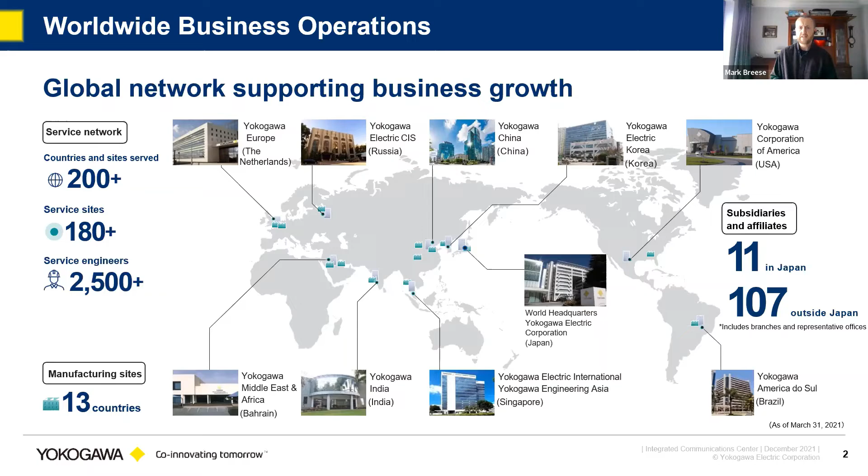But before I get into that, I think it's worthwhile saying a little bit about Yokogawa overall as a business. Yokogawa itself is a large business headquartered in Japan, and today it has offices all over the world, including 2,500 and growing service engineers to support people's needs. So no matter where you are, there's always someone from Yokogawa close by, ready to support and help with those needs. And the RAP business is a part of Yokogawa.

We began in the early 1990s with our digital software solutions, originally for very high hazard petrochemical and chemical industries. Since then, we've expanded from our original UK HSE type base to Europe, Middle East, US, Far East Asia. Over that period of time, we've consistently added new modularity, new capabilities, new solutions to our overall control of work offering in order to give our customers better visibility and even easier access to all things safety. But let's look at that safety in a little bit more detail.

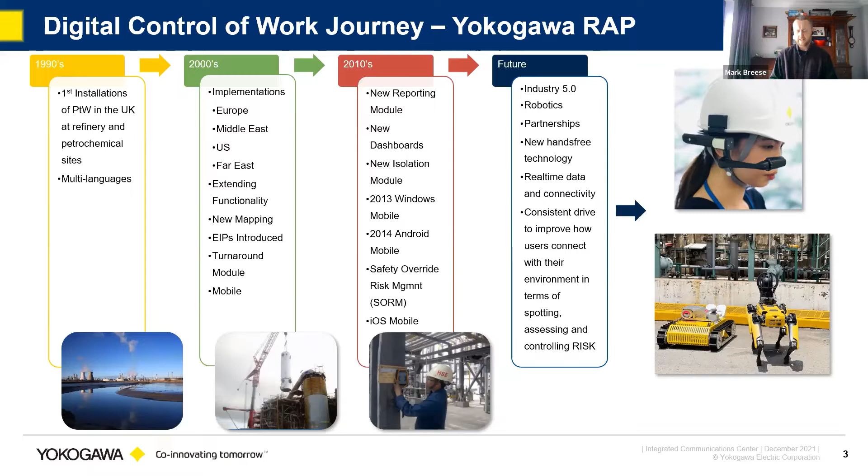What is control of work? Well, control of work isn't just the creation of a permit. It isn't just getting some signatures on a piece of paper or an electronic form to go and do work. Control of work is really about 3 things at its core. It's about the capability of being able to carry out risk assessments so that we can understand the work required and all of the risks associated with it. It's isolation management so that we can manage all forms of power that might affect people carrying out work.

That could be electrical work, it could be fluid power, it could be motive power, it could even be vehicles moving around the place. And those then tie together with the permit, of course, which has to have all of the authorizations and digital signatures together with it to produce an overall control of work solution. And of course, digital solutions are the easiest way to achieve this.

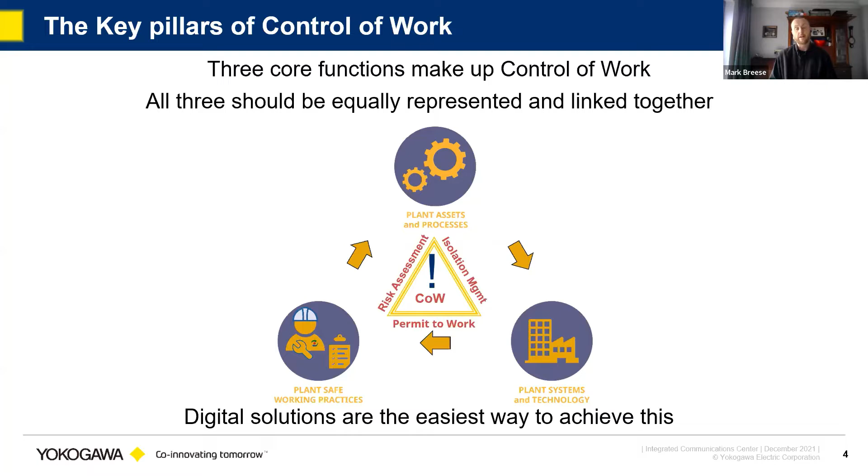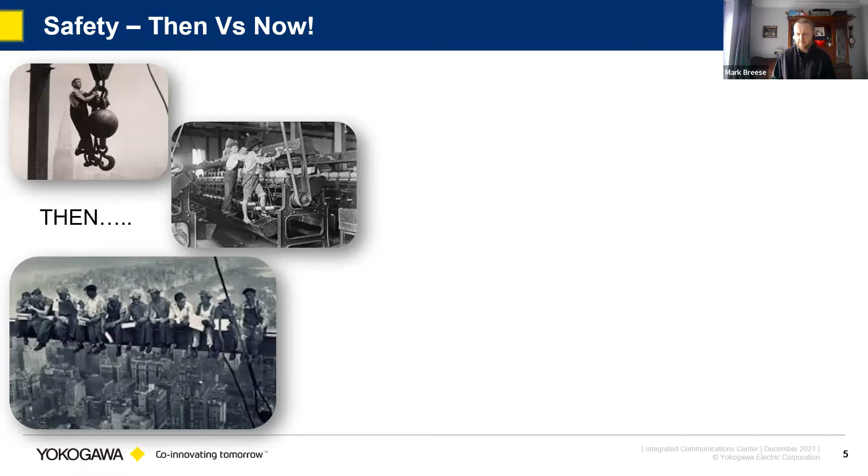A sad fact for you on that one is that for every foot of altitude in those skyscrapers, one person died in terms of the overall fatalities involved. And of course, today, life is much safer. We don't do things like that anymore, or do we? These are some typical examples of unsafe working that all of us will have seen on a reasonably regular basis. My favorite is the one in the middle where you've got three guys standing on a plank so that one can step out into an area to carry out some work. Incredibly dangerous.

It only needs for one of them to turn around and slip, and two are going to get a fall over, and the other one is going to plummet between a ship and a dock. Okay, some of these examples are from all around the world.

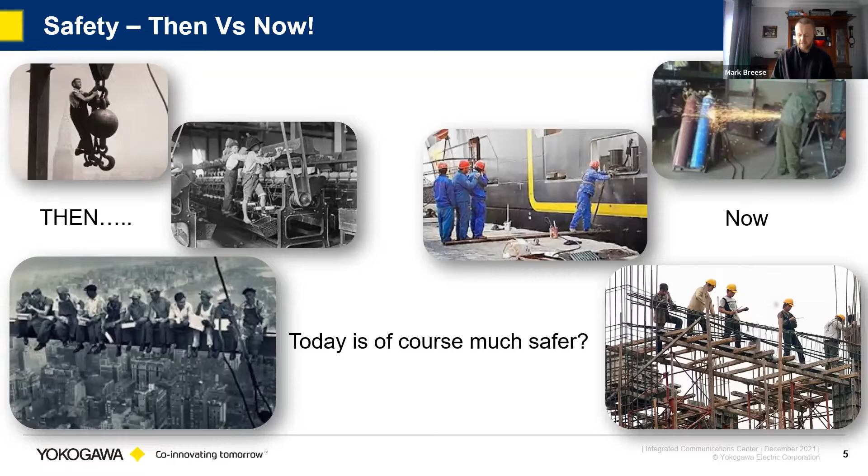So let's look at Europe and see how safe Europe really is. Some statistics for you: the latest statistics produced in Europe were 2019, just before the pandemic. In Europe as a whole, not including the UK, there were 3.1 million non-fatal accidents - accidents where people got hurt and had 4 days or greater away from work to recover, but weren't fatal, which is good.

However, in 2019, 3,408 people failed to come home at the end of the day because of a work fatality, which is a really scary number. The ratio is broadly about 920 to 1 - if you think of it as 1,000 to 1, for every 1,000 incidents you get one fatality.

That's about right. And sadly, non-fatal accidents and fatal incidents are increasing, with fatalities increasing faster than non-fatal accidents, which is interesting in and of itself. The core reason this happens is because 60% of accidents occur due to lack of or inadequate control of work, with poor understanding of risks being the primary factor.

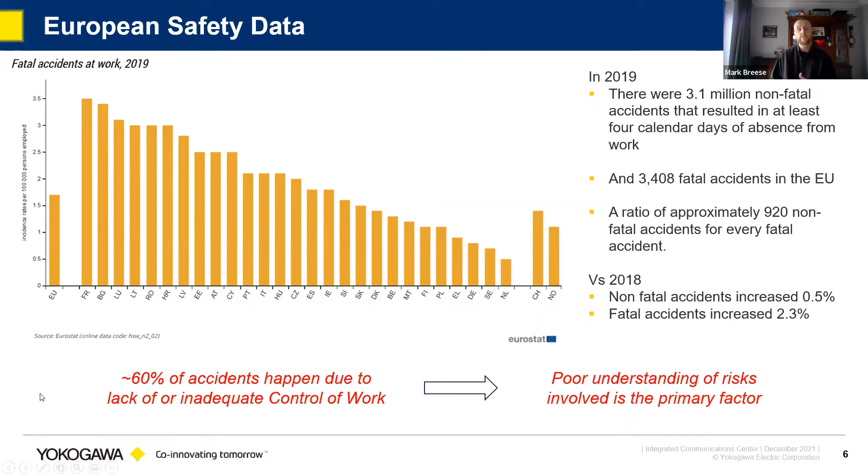Now, when we look at that in more detail, obviously people are trying to do things about it, and national and international standards are driving towards greater and greater levels of responsibility towards safety. The most recent of all is the new ISO 45001, replacing the Occupational Health and Safety Standard 18001.

There's an interesting paragraph in there, section 5.2, which says that safety can no longer be delegated. What that means is that safety cannot be the responsibility of the health and safety manager, or of individual people working within a business. Of course, everyone's responsible for safety, but the ultimate accountability remains with the management of any business now, in the legal format of the ISO standards.

And even the old 9001 standard talked about risk management and safety, saying that those who lead the organization must promote risk-based thinking. Well, if you're an ISO 45001 company, you have to do more now than simply promote risk-based thinking - you're ultimately responsible for it.

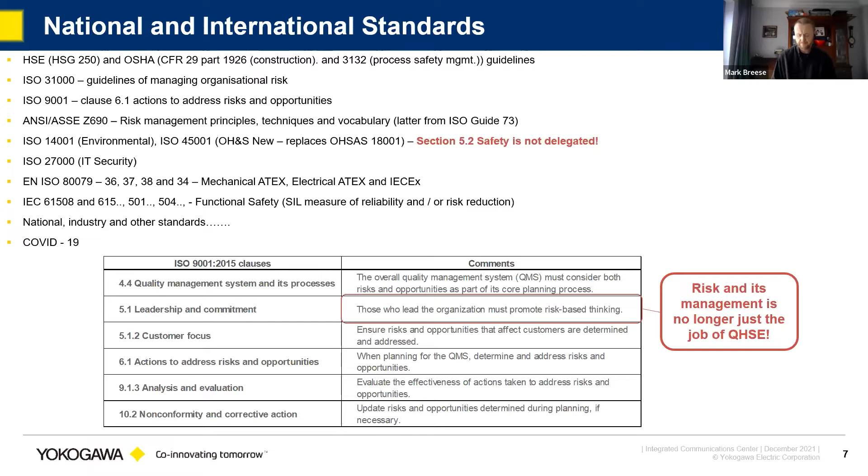In essence, we've seen the figures I've just put up, we've seen the details, and we've seen that we're trying to get more responsible and have tighter regulations around health and safety. So I think you'd all agree we have to be able to do things more intelligently. If we can do that, it will help us work more safely and really learn the lessons from the past and the incidents we may have had, to make sure they don't happen again in future.

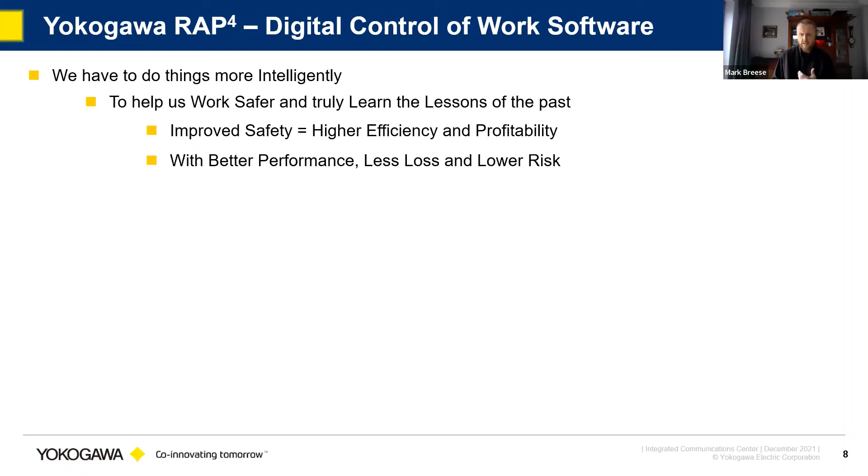Because if we can do that, improved safety will lead to higher efficiency and profitability and better performance for the business as a whole, with less loss and, of course, lower risk. And that's really where the RAP4 system from Yokogawa comes in.

It provides a series of modules, from risk assessment to safe lockouts, through mobile functionality and all of the other services you'd expect around that. And at its heart, a capability to have a common safety vocabulary that's really easy to use and understand by everyone involved, to make their work and their life a little bit safer.

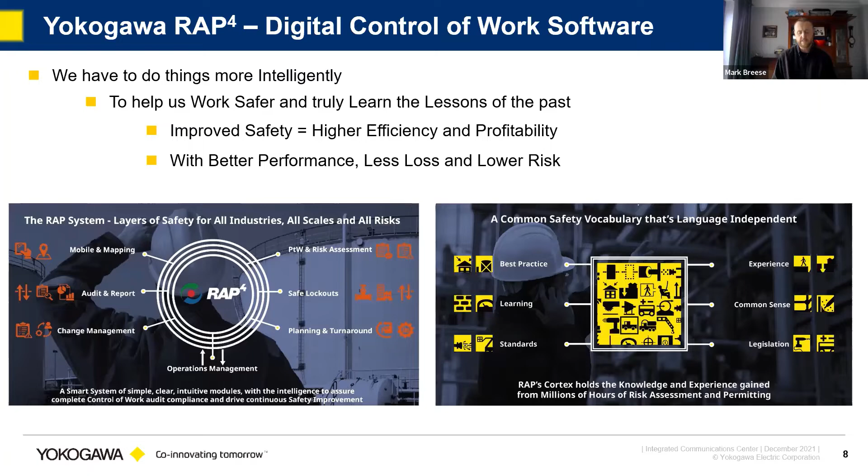And that's set out as a linked, intuitive workflow that's easy for everyone to see every stage along the process and to be able to carry out audits along every stage of the process. So in essence, you get a smart system of clear, intuitive modules with that intelligence baked in from day one, to assure complete control of work compliance and to enable businesses to drive continuous safety improvement.

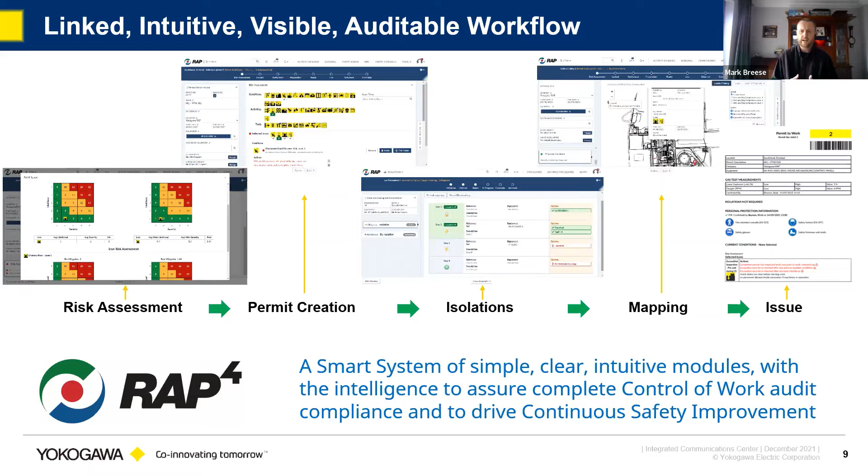And let's look at how it does it. So instead of giving you a massive wad of paper to fill in with tick boxes for applicable and not applicable and decisions to be made - and those can be in simple digital format or paper format, depending on the traditional modes of working.

The RAP4 system does exactly the same thing, but it allows a greater level of focus by simply asking: what are the conditions under which we're working? What are the activities that we're carrying out? And what are the tools being used to do the work?

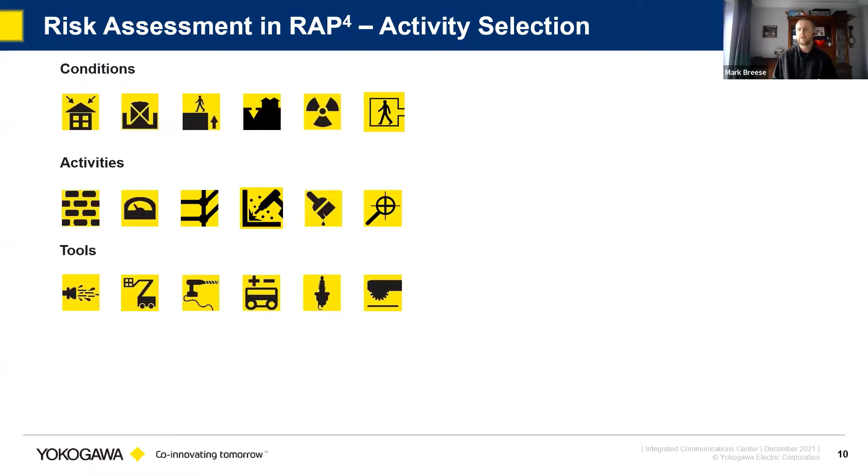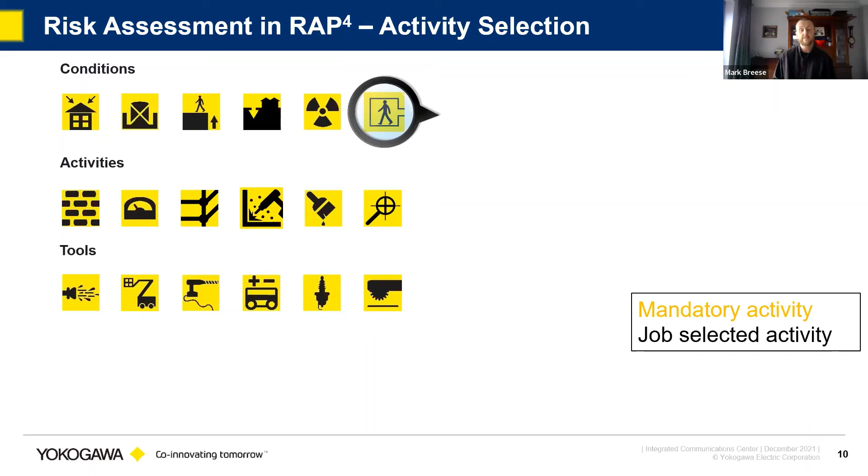So if I take an example of a confined space, behind that icon we would hold all of the mandatory activities required to do the work and all of the job selected activities, specific to that individual work item. So in a confined space, we might be placing a standby man

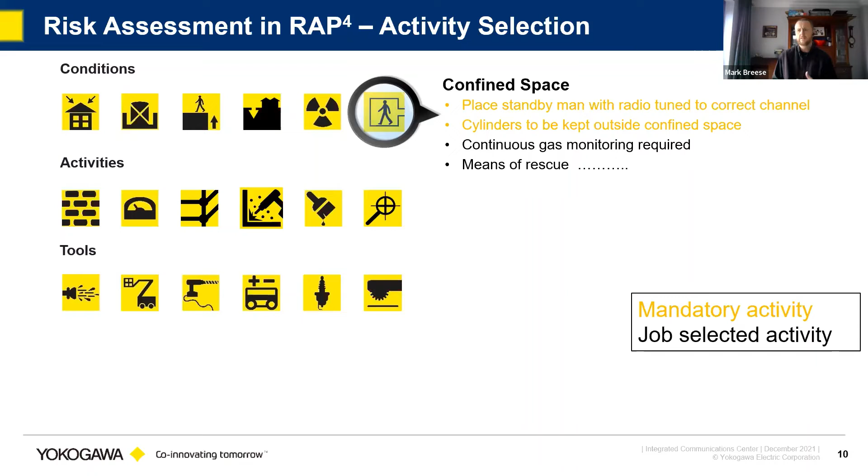independent of the work in case something goes wrong, so they can call emergency services. As optional activities, we may have continuous gas monitoring depending on the type of confined space we're entering, and these will differ depending on the icon selected. So if I pick welding, another set of rules would be applied automatically, and if I'm carrying out water jetting, another set of rules, including making sure I don't electrocute everybody along the way.

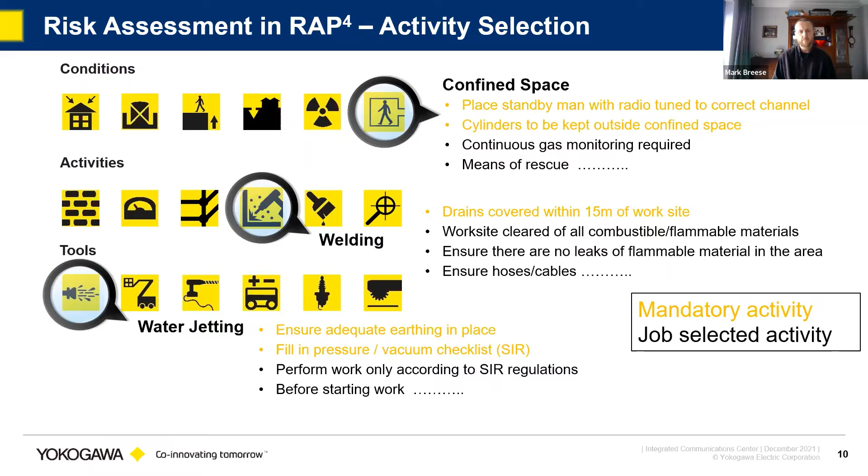So we not only have mandatory activities and job selected activities, but each icon can also be configured to hold additional items such as the PPE required, the authorized signatures at each step to make sure the risk assessment is correct. Exclusion zones can be set, and lots of other data can be tied to the selection of the icons, and that data is very specific to those icons, so it's relevant. You get away from all of the non-applicable decisions that have to be made under normal conditions.

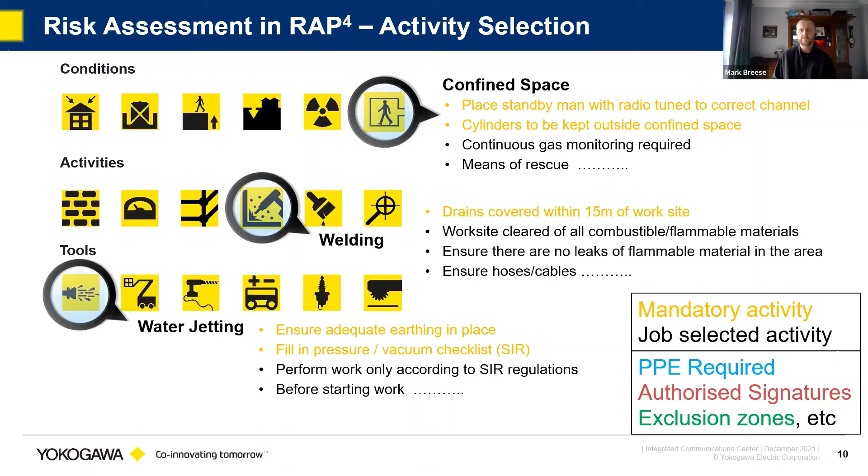So when you come to carry out work using the RAP system, it looks a bit like this. We have a master certificate vault that holds all of the information set up for our facility, and we simply look at the work we're doing. In this particular case, we've got a dirty confined space that we are going to clean.

Once we've done that, it will of course be a clean confined space that we may choose to inspect. And once we've inspected it, we might carry out some repair. So the way that we organize work is as simple as 1, 2, 3. And being able to use a digital system allows us the level of granularity we need.

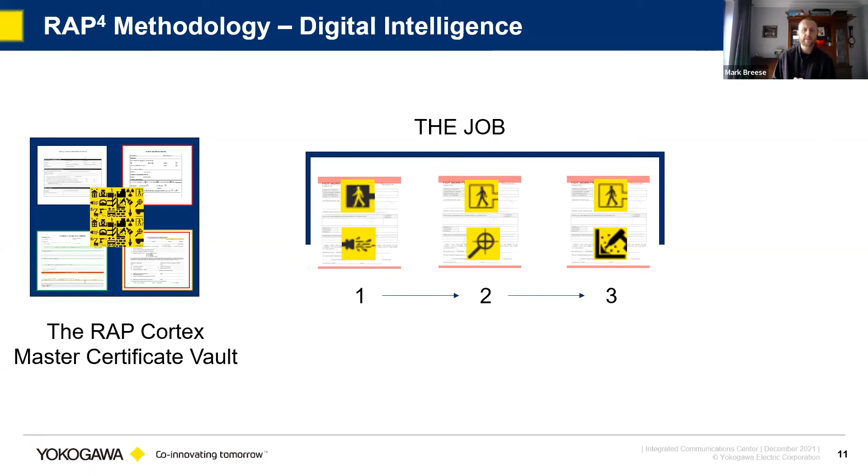As an example, if I look at confined spaces, there are lots and lots of forms. They may be clean confined spaces, there may be dirty confined spaces, which have far higher restrictions applied to them. It could be inert, floor and ceiling voids, which are things you see quite often particularly in the pharmaceutical industry - very important to risk assess for, often with low head height as well.

Habitats and enclosures, when we might build a tent around the work that we're doing. And even excavations, when they go below about 0.5 meter, become confined spaces in the eyes of the law. So we need to be able to risk assess.

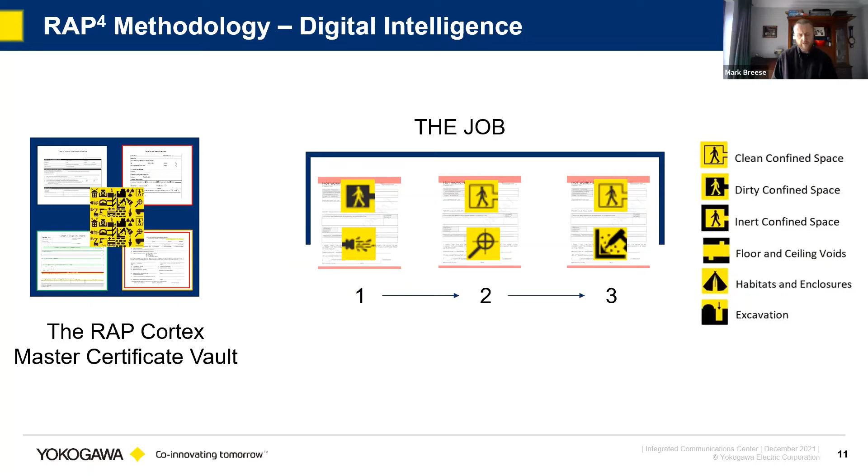We also need to be able to tie together all of the forms of isolation that may be required in order to make them safe. The examples you can see in the pictures would be process isolations - simply closing valves and locking them out to make sure there's no fluid running. But the isolations may indeed be electrical type isolations or others, as I've mentioned before.

So isolations allow you to specify all of the equipment associated with the isolation so we can control those energy sources, and have the ability to attach drawings, schematics as may be necessary, to print lockout/tagout tags to be in full LOTO compliance. And the system also allows mobile devices to be used to confirm that isolation status in the field.

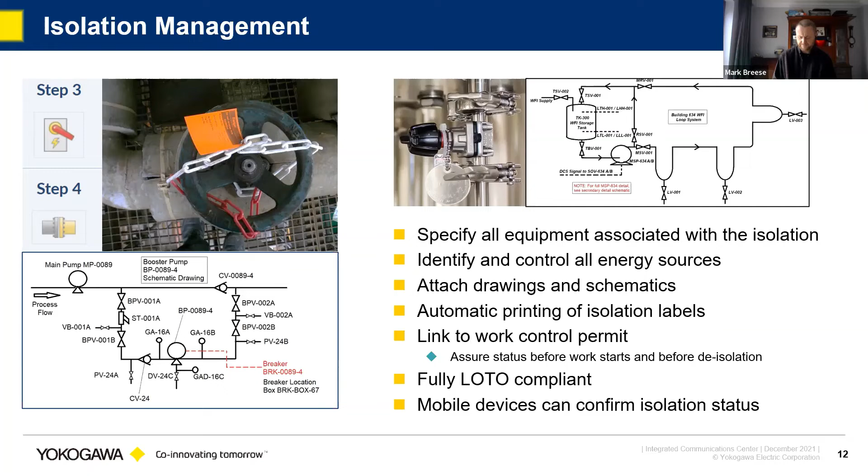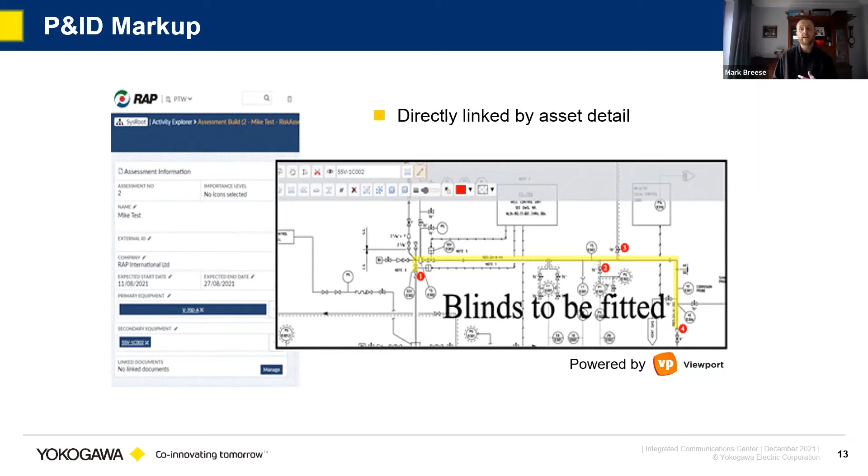Indeed, we can also look at drawings and mark up P&ID drawings to give the team doing the work detailed instructions of what's required for them to carry out as work. And that information can be fed in from the beginning from CMMS systems - examples might be SAP or Maximo - so that the whole thing is a seamless transfer of information from the original creation of the work item right through to carrying out and doing the work successfully in the field.

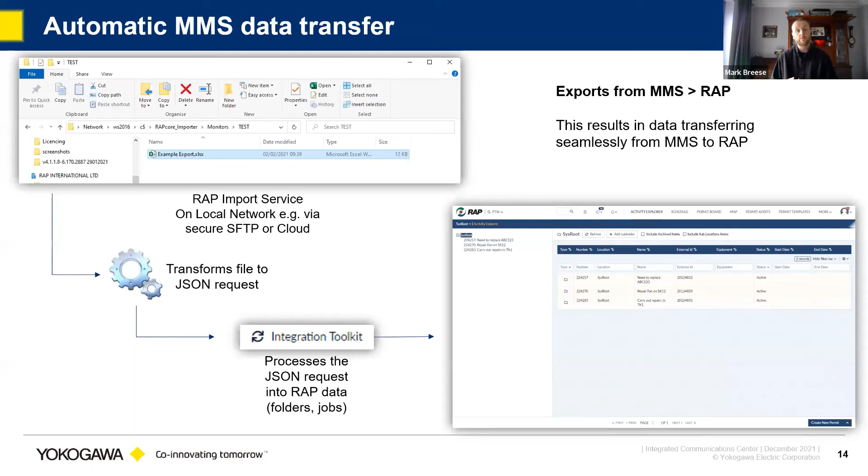So we can look at existing risk levels, we can look at future risk levels, we can look at the types of jobs that we're being asked to do, and we can start to level load plants, which not only makes them safer places in which to work, but also makes them more efficient.

So really what we're looking at here is an integrated workflow. We start with the core risk assessment. It's why the RAP system has the name RAP. RAP simply stands for the risk assessment process, because it is at the heart of everything that we do.

So we start with risk assessment. We then create the permit. We select the icons as part of that work. We tie together the isolations as may be necessary and are able to fully map the process so that we have the greatest level of visibility possible for all of the workforce when they come to do the permitted work. And yes, all of that is visible on mobile systems and can be mobile mapped.

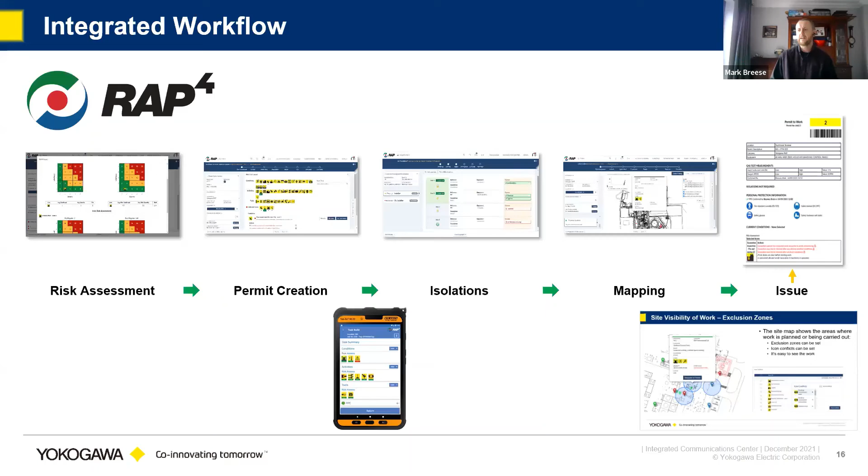So when we look at it in a bit more detail, we might look at where the work is, and that would allow us to see where there are exclusion zones as an example. In this particular example, what you can see is two circles. They're actually cylinders because they go through the floors above and below to make sure that work above or below is notified. But you can see the exclusions where the item with the red dot can't begin while the item with the green dot is still going ahead.

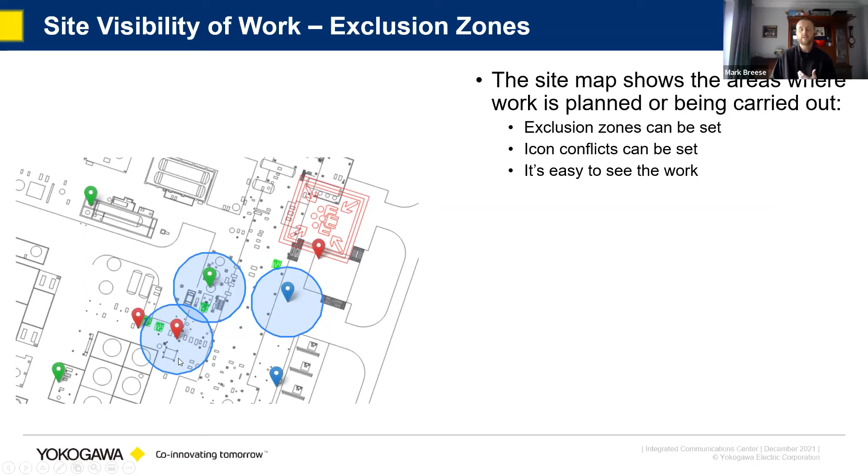We can use the system to simply look at what we're doing, in this case, some inspection work, and we can see what sorts of exclusions we can apply and conflicts we can apply, in this case, breaking containment, because we wouldn't want to be able to have the risk of opening pipe work near to where somebody's in a confined space, because it could pour something nasty on them, or in certain cases where you get a very high flow, it could flood that confined space before they get out, and we'd be looking at fatalities.

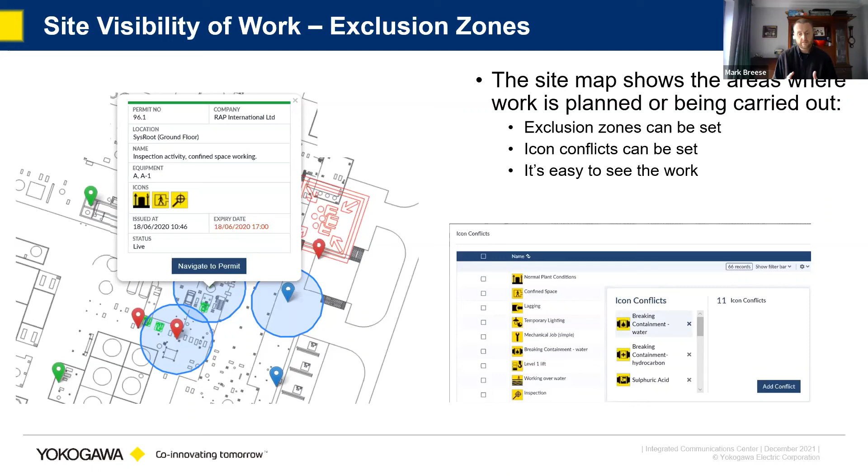And it really is as simple and quick as that these things happen and go wrong. But getting it right not only leads to safer working, it leads to some really big advantages in terms of savings that can be had for a business by working in a safer way.

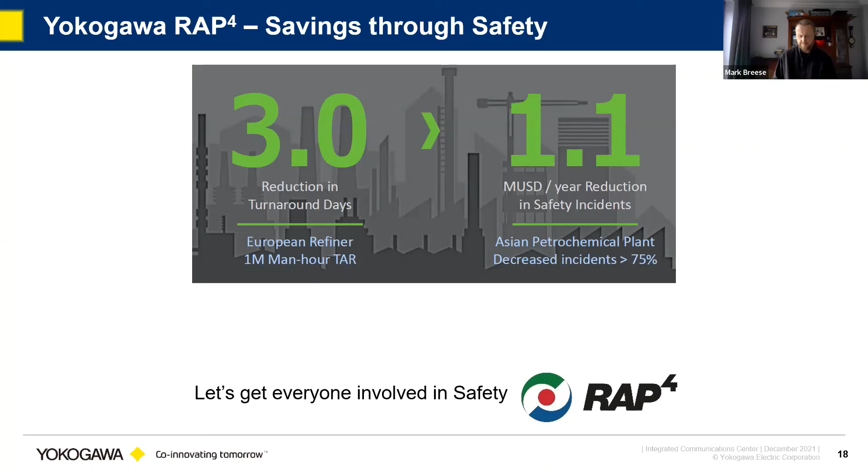So it really is important that intelligent safety is tied together with empowered people, because we believe that everybody should be able to be involved with safety. There are no individual seats on the RAP system in general. Everybody who needs to be involved with safety can have access to the system. And that leads to, in turn, smarter, safer working. And that's really what we at Yokogawa RAP are all about.